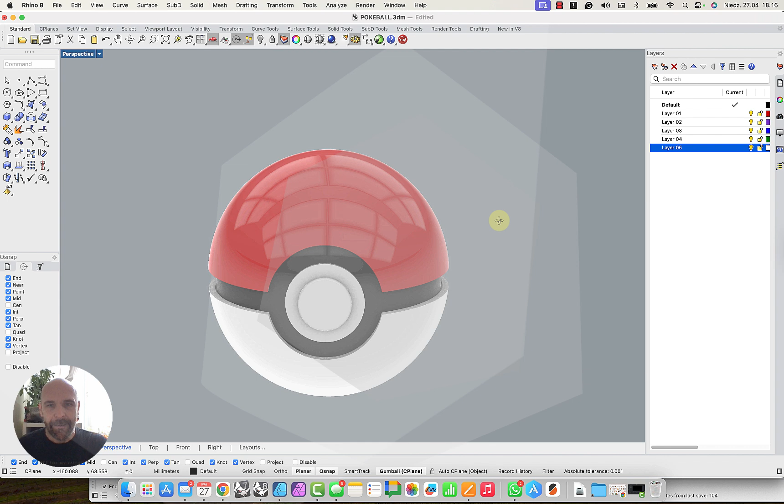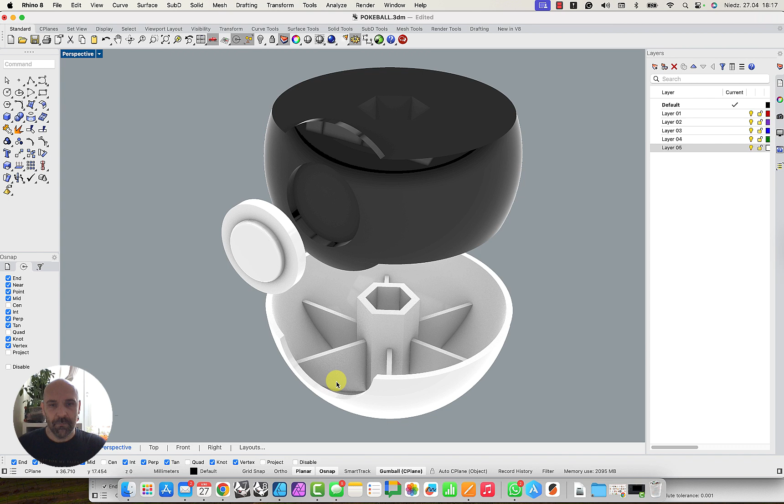Today we're going to learn to model a Pokéball, like you see on the screen right now from Pokémon. It's gonna be very easy, I'll show you how to do it. It's kind of fun because after you actually model it, you can print it. I've prepared some special features for the Pokéball to be solid, and it's very easy to model. I mean, I hope it's easy, we will see. Anyway, try to follow me, step by step I'll show you how to do it.

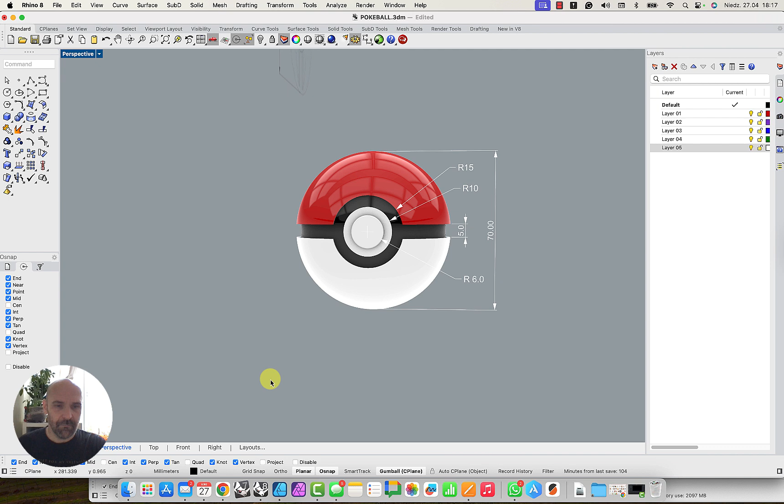So I start with declaring the dimensions. In this case I wanted to be very ergonomic, so I prepared the dimensions like you see on the screen right now. I made a screenshot of that dimension so we can have it on our work area to the end of the tutorial, so it's actually with us. I'm going to put it onto a layer and hide it.

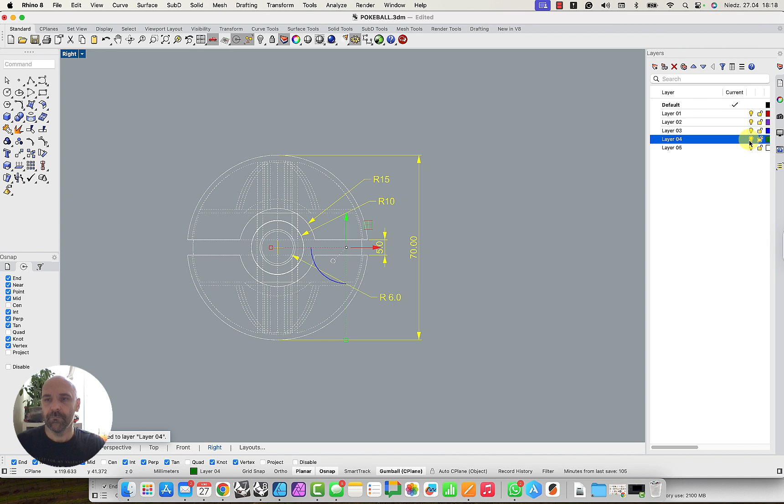Alright, and I'm going to switch to shading mode, and front view is going to be the view I'm going to model it in. So I hide the already modeled Pokéball.

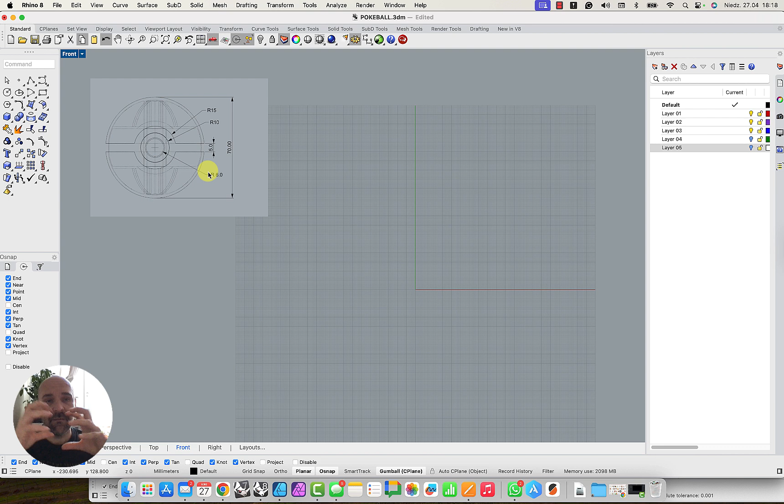So let's start with the sphere. Generally, the tutorial's going to be made with the Pokéball made out of these two spheres, and then I'm going to split it into the shells. The second sphere is going to be just construction to join the two outside spheres. So take a look, the first sphere is gonna be diameter 70. So let's go and get the sphere.

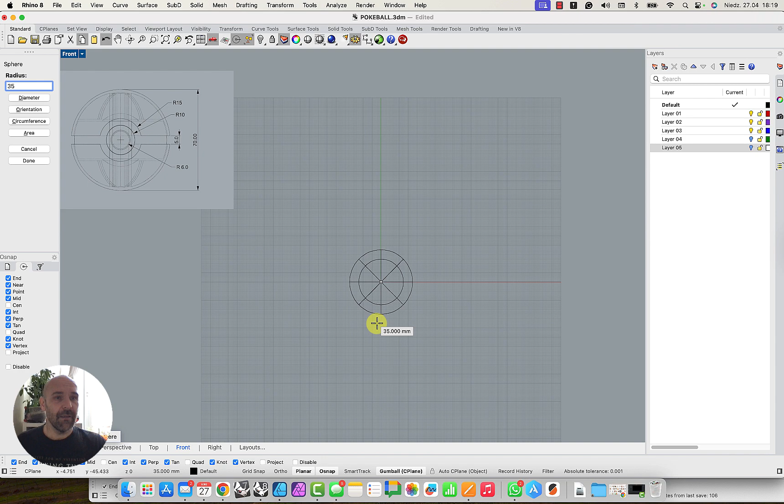I'm starting everything from the 0 point, which is good habit. So let's do it now. Type 0 and press enter, and then just type 35, because Rhino is asking me for radius, and I'm having diameter here, so 35 gives me 70. All right, and I have it.

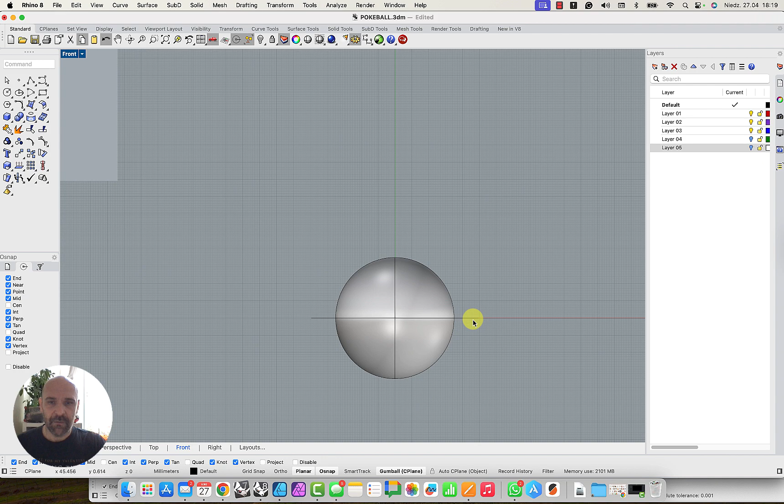The gap between two shells is going to be 5 millimeters. So I'll draw a line from the 0 point, and then I'll move this curve to be just in the middle of the sphere, and then I'm going to offset this line on both sides by 2.5 millimeters. So let's select both sides, and then we've got it. I can delete that middle line, and then between those two lines I will trim.

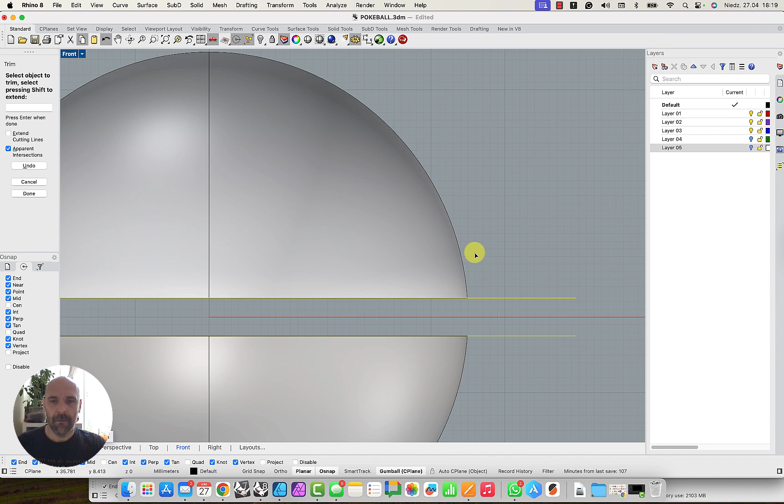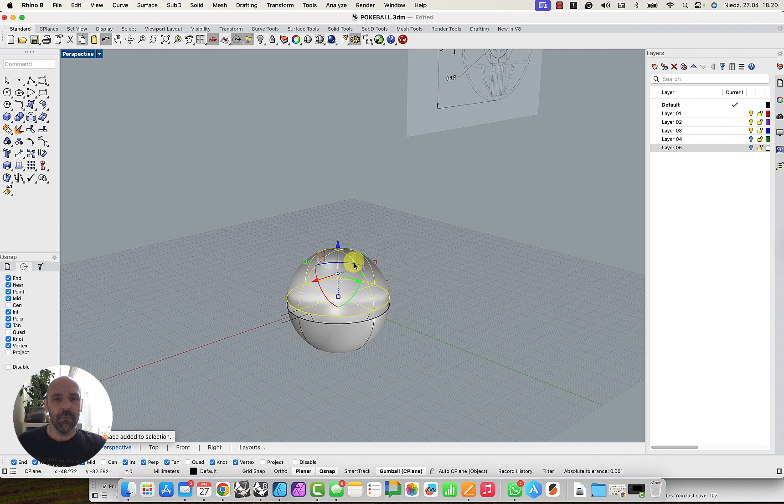So this is declaring the first two shells. Those shells are empty actually, and I need to close it, and then just by typing cap, CAP, this gives it a nice beautiful flat planar cap, and then I can do the same with the bottom, cap. Right, and straight on I need to have thickness.

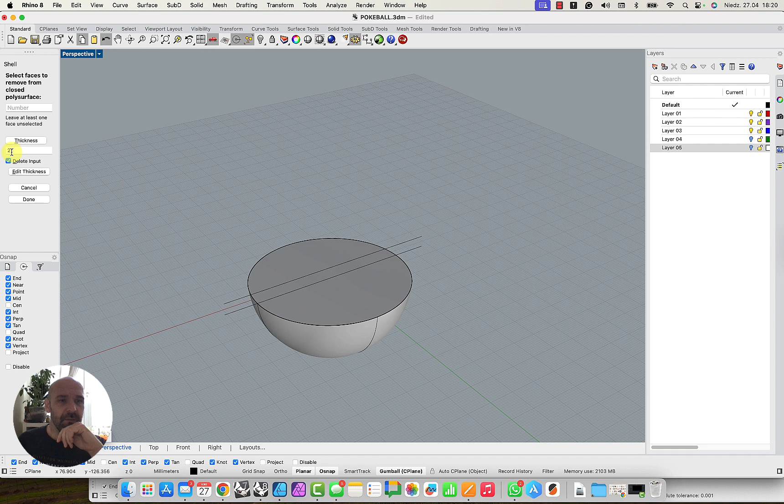So straight on I'm going to type shell and declare thickness, which is 2 millimeters in this case. The 2 millimeters is optimal for that kind of structure to be solid when you print it. You can increase it a little bit, but not less than 2 millimeters, I suggest. So this is the thickness right now, and the same here, shell. All right, so we've got two shells.

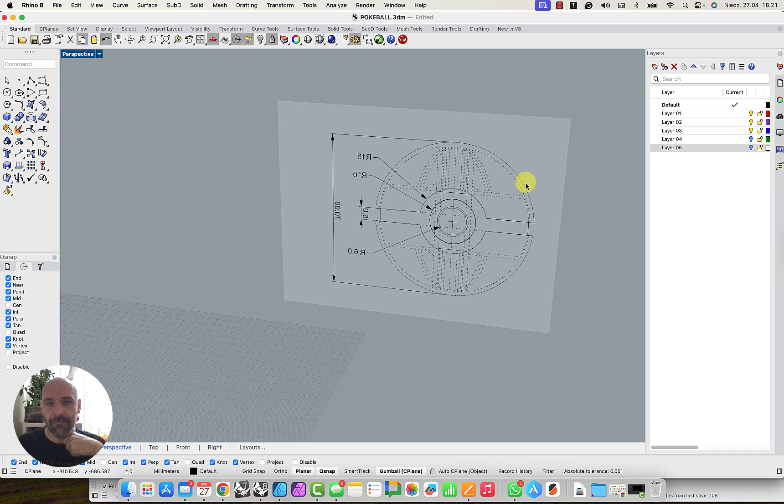Basically, we're gonna keep focus on one because, as you know, the Pokéball is symmetrical, so we don't need to have two sides. We can mirror one of them later, but just let's stick out both sides for the shells right now, maybe later we'll delete it.

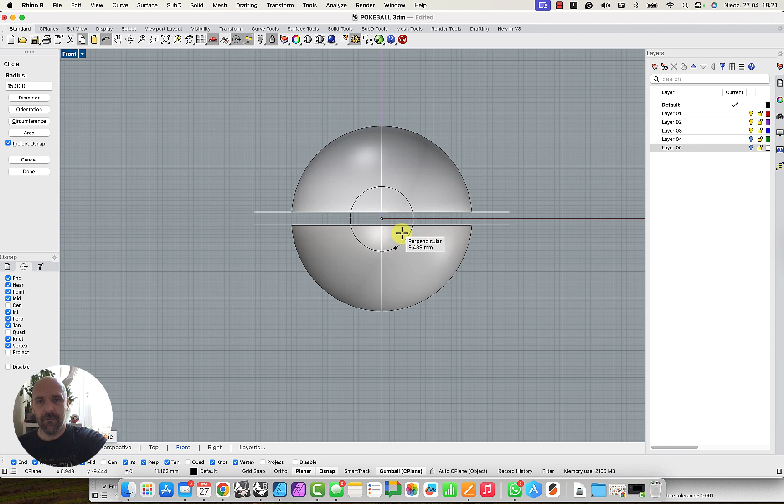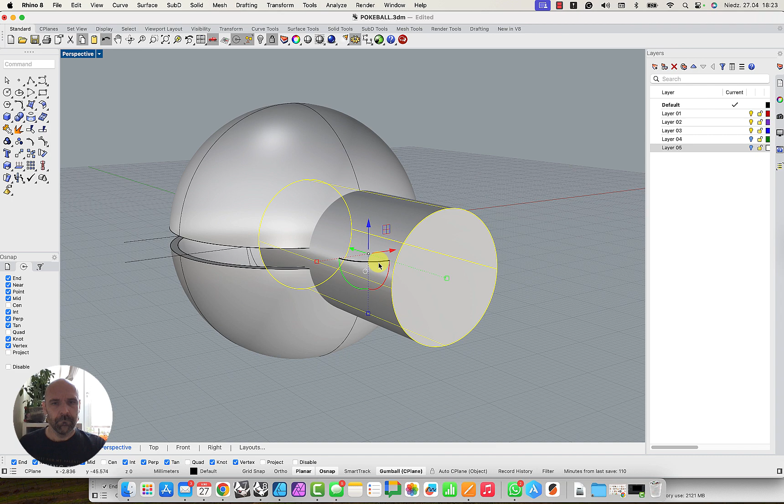Okay, so now I'm going to have the circle, the cutting in the shell, the half circle here, cut it. So I'm going to have a radius 15 circle, which is also from the 0 point, radius 15. Yeah, I've got it here inside of my sphere because the 0 point is just in the center of the sphere, and then by just pressing that dot, directed in the y-axis, just drag and drop.

And use the command boolean difference. So those two shells are gonna be the input for subtract from, and then that circle's gonna be for subtract with. Press enter to confirm. Okay, so go to the front view now, and now I've got a beautiful cutout in the center of my Pokéball.

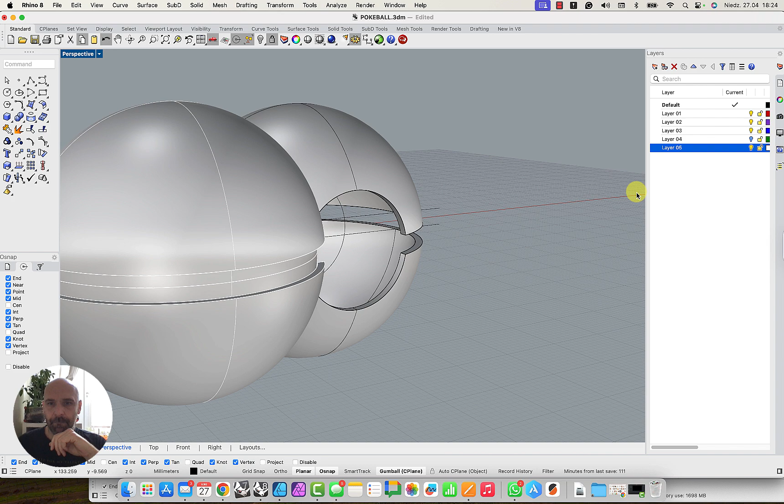And now we need construction inside, which is actually this construction here. I'll show you. It's gonna be holding both sides, and then you've got a kind of insert construction inside to fix the Pokéball in the right direction. Right, let's do it.

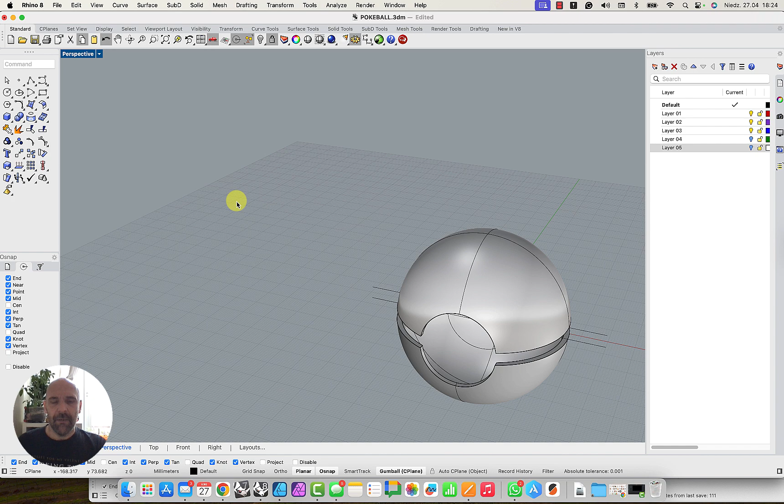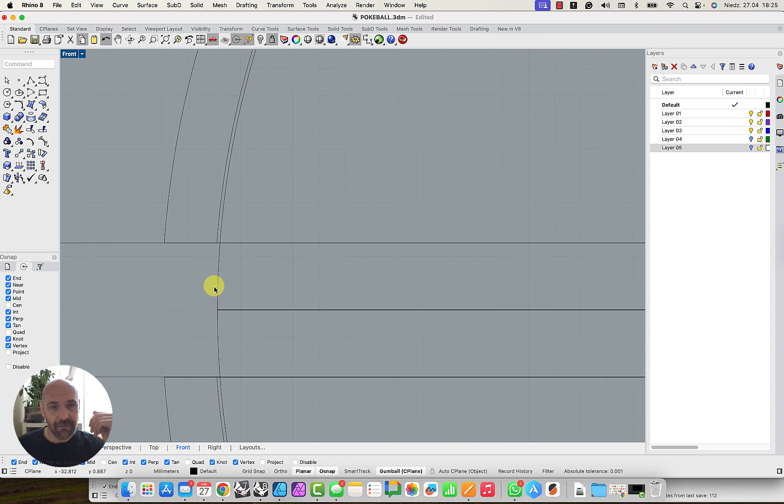So let's go for another sphere, 0 point, and then shift directing the mouse on the left or on the right, lock it with the top, and then find the right position, which in this case is going to be somewhere here. It doesn't need to be very precise because it's inside, and it needs a little bit of gap to be able to connect both shells together. All right, it looks like so, already looks great.

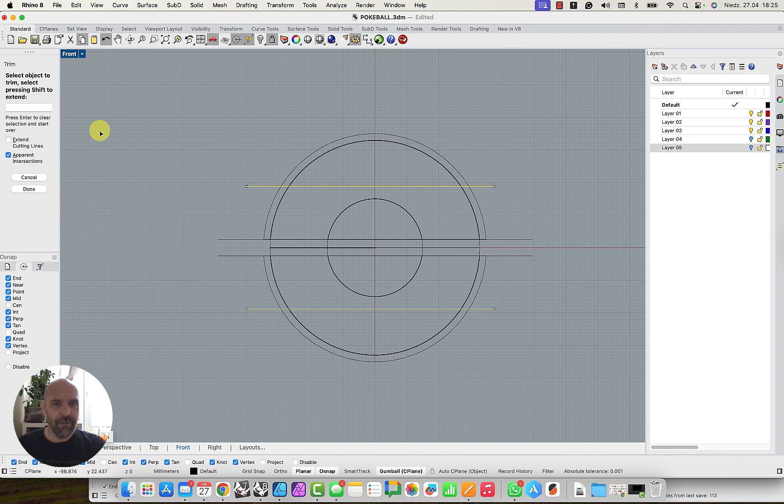Right, and now we need to cut out the inside sphere, just a little bit upper here of my construction, and then mirror it on the other side using the 0 point as a mirror point. Right, and then I'm going to cut out with trim the inside sphere.

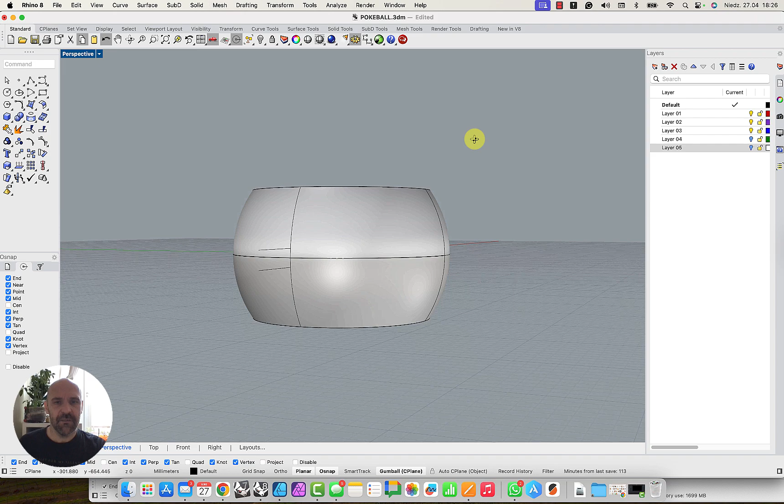Okay, I don't need those curves anymore. You see, I've got construction inside, and then I'm going to hide the shells, and I got my inside shell ready to be capped. Alright, I've got it. Now I need to have the inside button here placed somewhere, with a specific dimension, which I will find here: the outside is a radius 10 and the inside button is 6, so

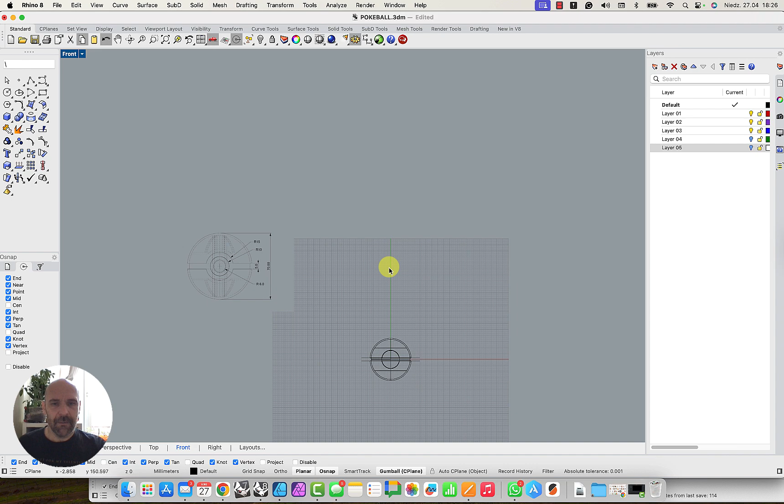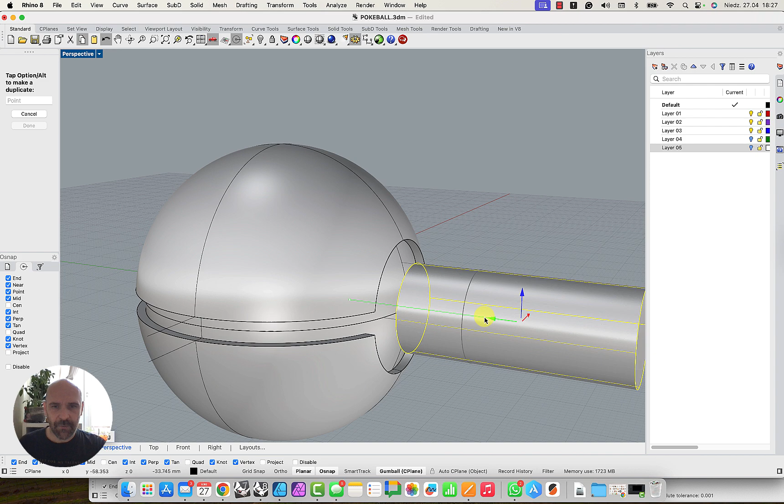10 and 6. Alright, in this case I'm going to place a cylinder from the 0 point, and it's gonna be radius 10. And my size of cylinder, let's just build it, and I'm going to cut out a hole here for the button to be placed later after printing. Okay, so let's just boolean difference.

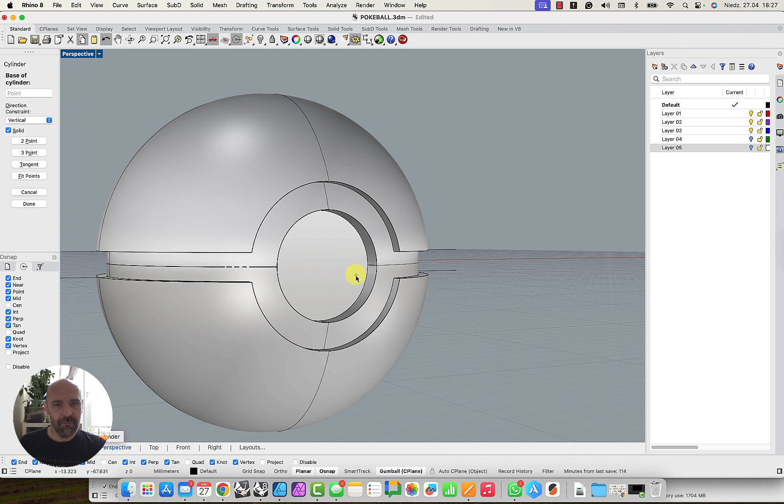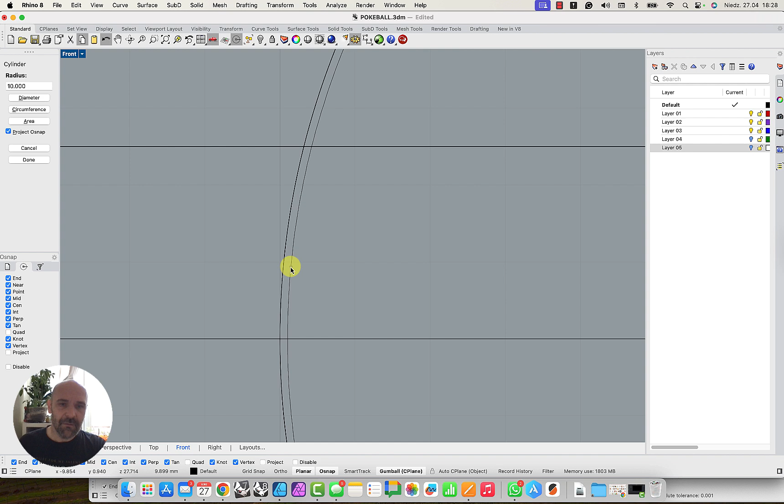Alright, so this is the place for the button, and now I'm going to draw my cylinder again, but the starting reference point is going to be that surface. I need to have the center of it. Go to the front view and make your cylinder a little bit smaller, like 9.9 or something. Just give it 0.1. I can type it as well, but there's no need to type it. And then just build it a little bit outside the form, like so, and it's ready.

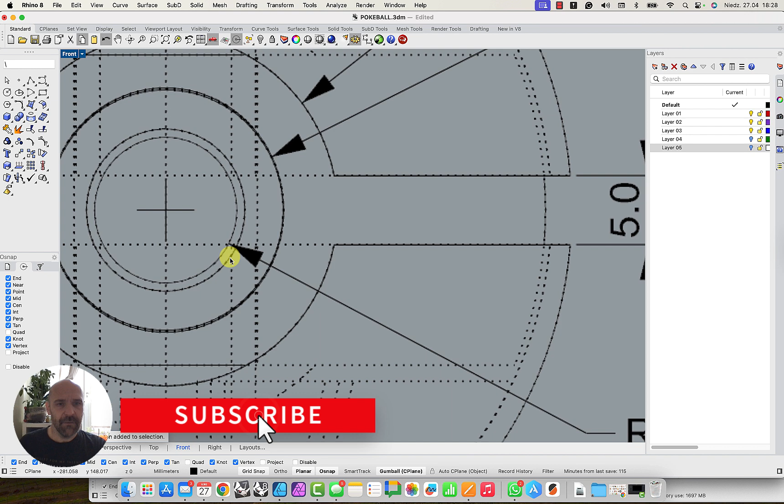And now we need to place the button here. This is gonna be printed separately as well. Right, so let's have a look at the inside size, which is 6, but I see I have selected the fillet cutout, so I need to give it a little bit more, like 7 or something. Let's try to put another cylinder there. Find the center of the previous cylinder and then radius 7.

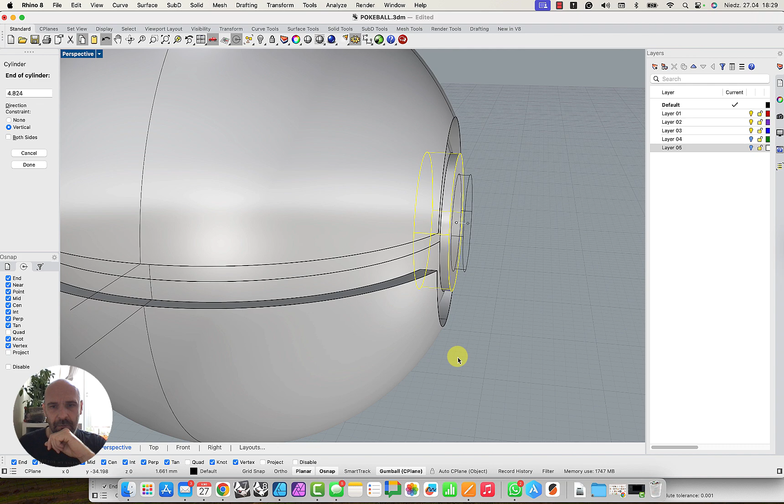It's okay. Going a little bit, like 1 millimeter. Let's see how far we can go. 1.5. So type 1.5 millimeter here, and it's gonna be our button. We can now boolean together, and then I will give it a little bit of fillet here to look smoother and nicer. I guess 1 millimeter should be enough. Yeah, 1 millimeter is enough.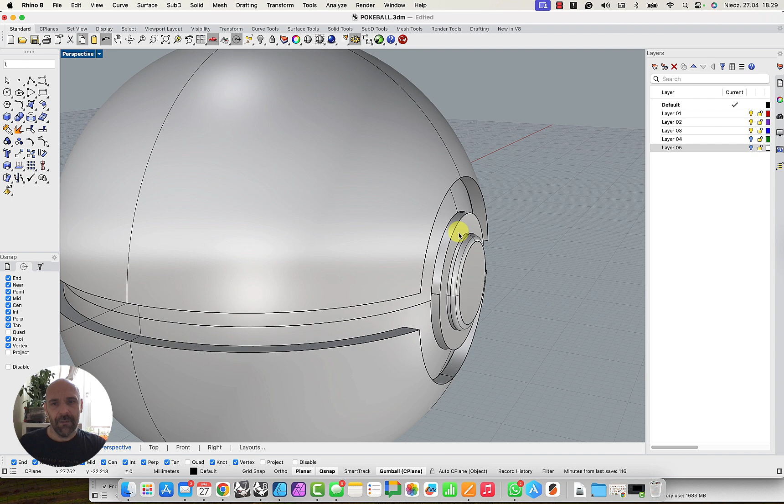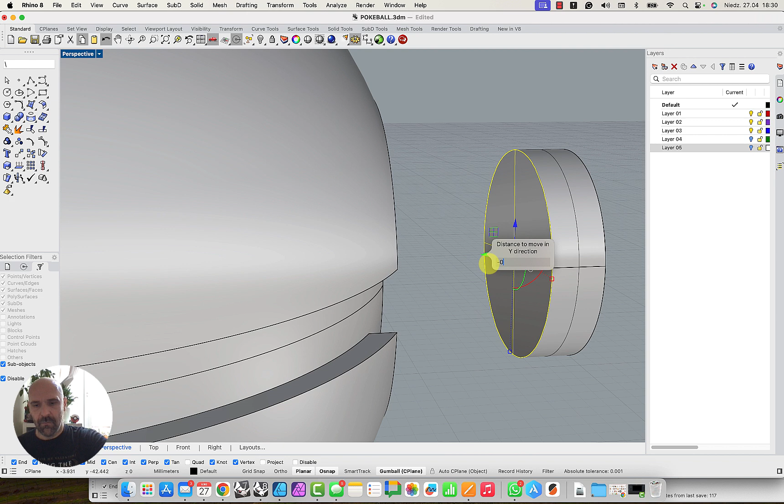I'm not sure if it's okay to be that much outside of the form, so, and this is a nice feature of Rhino, I can turn on Gumball and then move it here. Just select the surface and move it by hand, or just by clicking on it and typing minus. In this case, I have to type minus because my arrow points the opposite way, and I need to rescale a little bit. So I will do it like minus 0.5. It should be okay. Let's see.

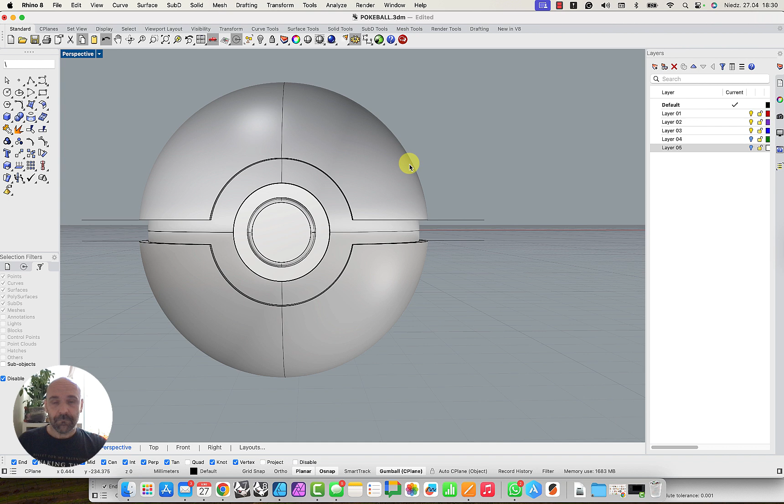Now let's turn it off and then move it with the move command to the right position, which is the surface I started making the button cylinder from. Now it looks okay. All right, so we have it. Now I need to focus on the construction, which I'll show you right now. The construction is going to be made first by placing the right shape, which in this case is a polygonal shape with 6 sides, but in a specific position.

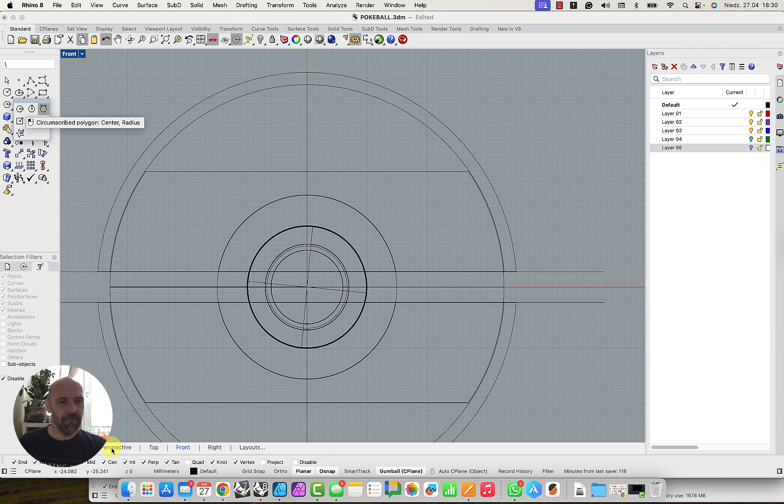So let's hide the shell. Well, now it's time for deleting it. So I will delete half of it. Now I'll place my polygon shape over there. So let's type 6. 6 is already chosen, and now I need to select the center. Well, I don't have the center because this is cut out from the sphere. So I need to draw a specific line to find the center of my top shape.

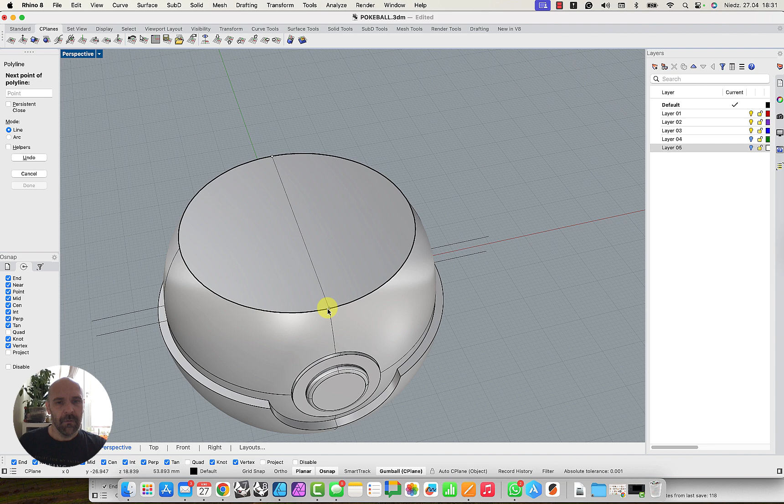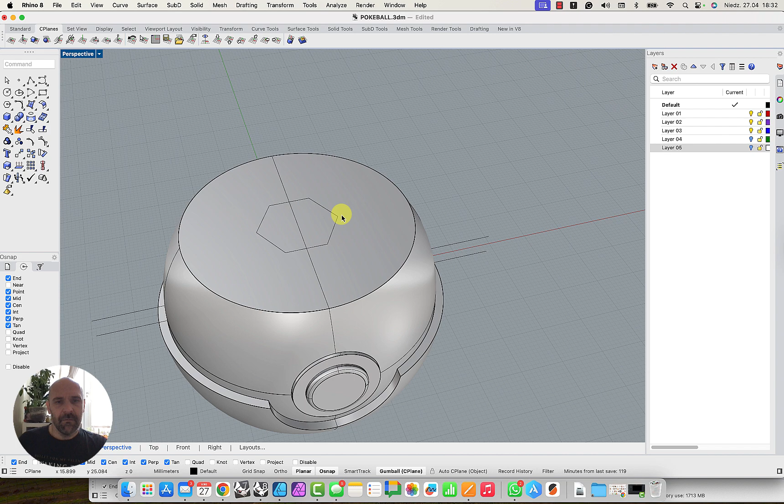Let's draw the line. I don't need knot and vertex, and I don't need near. I need end, midpoint. Yeah, and now I have a center, and in the middle of that point I will place my shape, like that, and then I'm going to extrude it here, or maybe I will extrude it both ways like that.

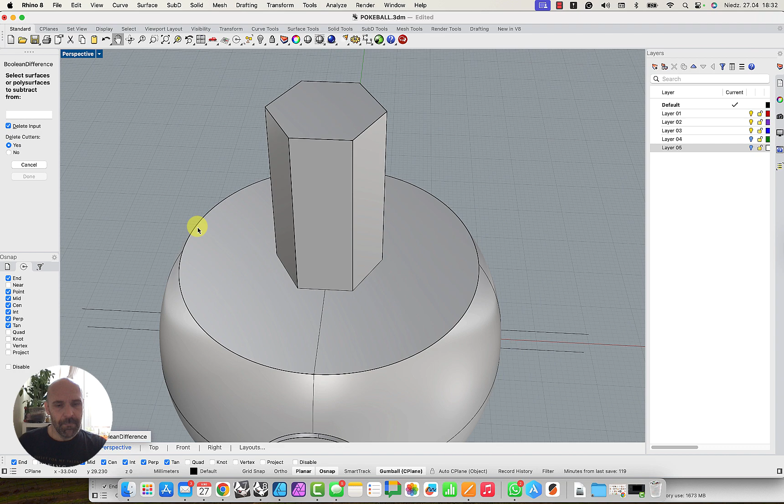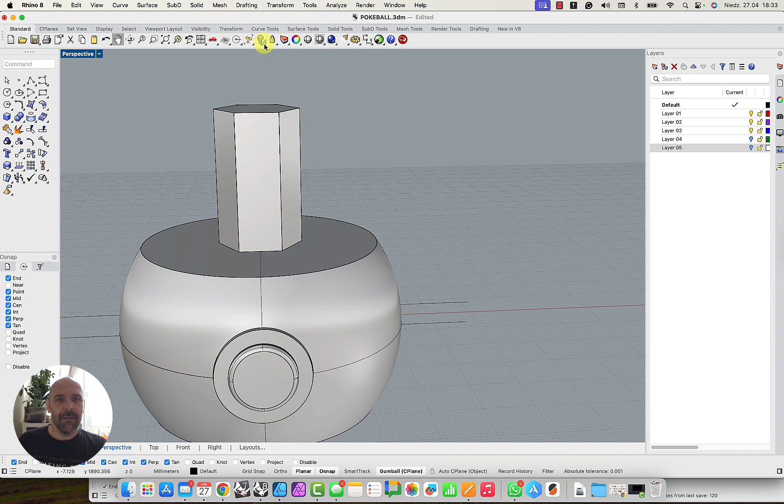And then I'll make a hole, cut it, but before I cut it through, I will make a copy, Ctrl C, Ctrl V, and then with Shift pressed, scale down the copy, which is now inside, and I will boolean difference the first shape, which, you see, left a gap for placing the top shell of the Pokéball. Now I will try to fit it. All right, now I will find my Pokéball shell.

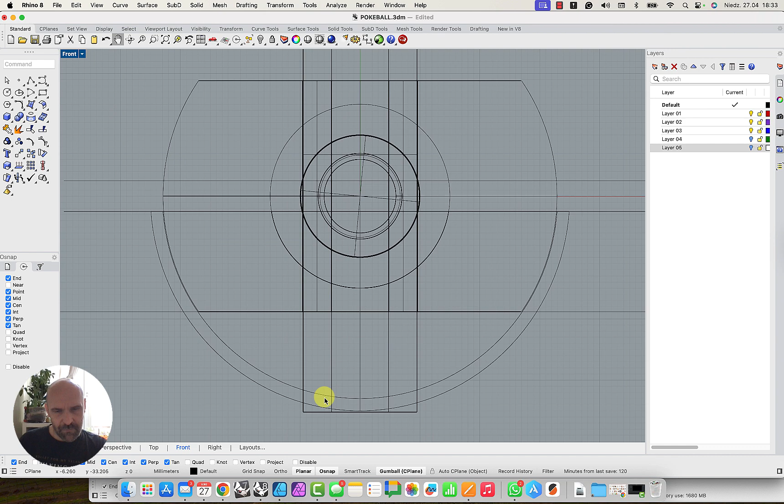There it is, and I need to find the limit; the inside sphere is coming up to here, so I need to select and mark that area, because I'm going to make nice slabs over there down to the bottom of the inside shell. Okay. Probably gonna be good to cut that shape here. Yeah. All right, and now I'll hide it and cap it.

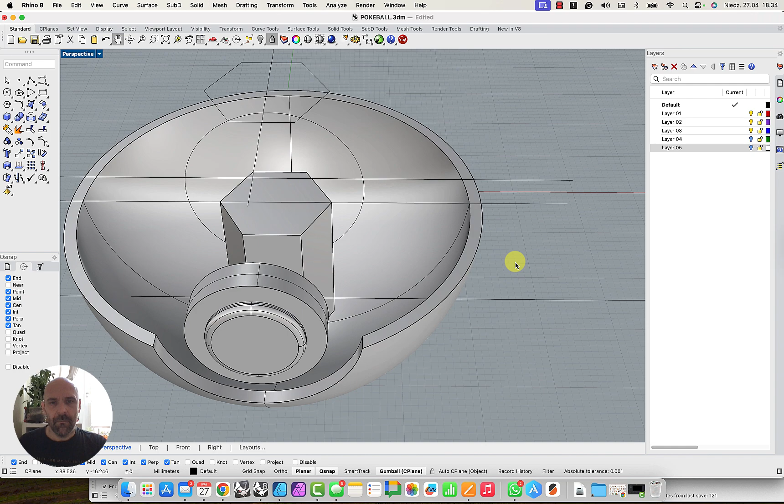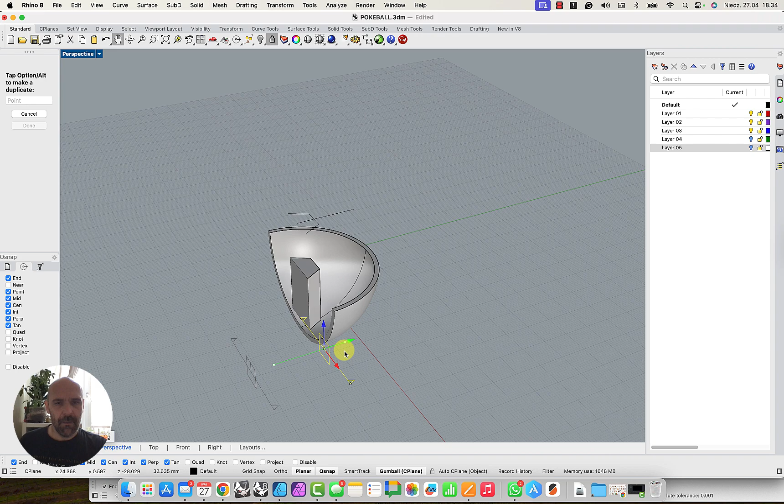All right, now I have it, and this is gonna be my shape, but the shape isn't going straight to the bottom of my bottom shell. Let's see it. Clipping plane will help us see how far we are. Yeah, we need it to be extruded to boundaries here and then joined together. So let's just extrude to boundaries.

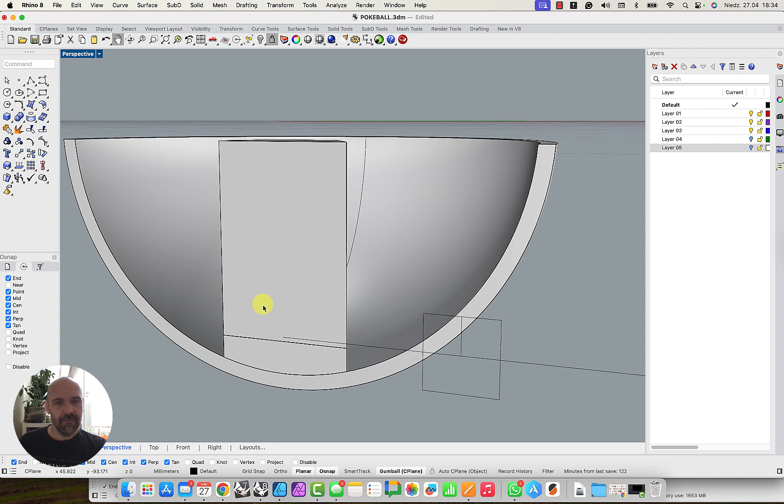Enter and again to boundary, and the boundary is gonna be here. Yeah, we've got it. Fantastic. And then I can join them actually all together. Okay, the clipping plane, as you see, helps you to work in the kind of slicing option. You slice that with a specific plane, and then you see all through. Okay, but I don't need it right now.

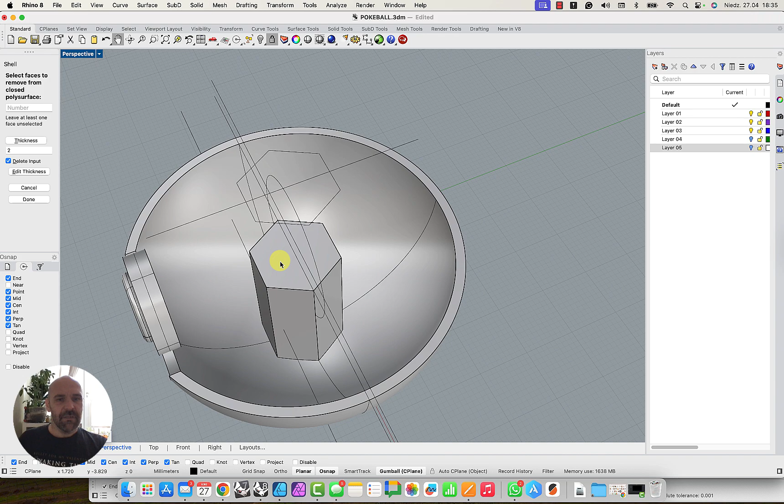Now I will make the construction inside. Probably it's going to be good for printing if I make a 2mm shell over here as well. So the 2mm shell is going to be here. Alright, it's good. And now I need to find my limitation here. The limit line. And then it's gonna be the limit for my ribs here. I can delete that shape as well. I don't need them anymore.

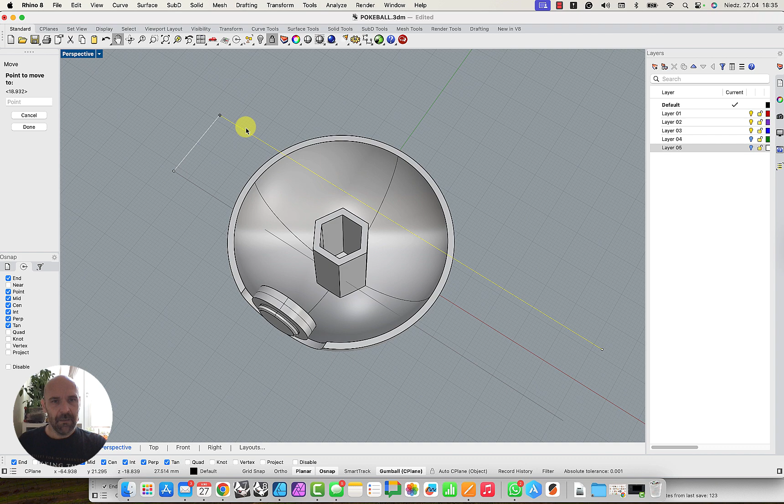Okay, now this is gonna be helping me making the ribs to make the solid construction. I will center it. I'll kind of, yep. Okay, this is gonna be my rib shape. Let's see if it works. The rib, it's here. This is the rib. Let's see if this works.

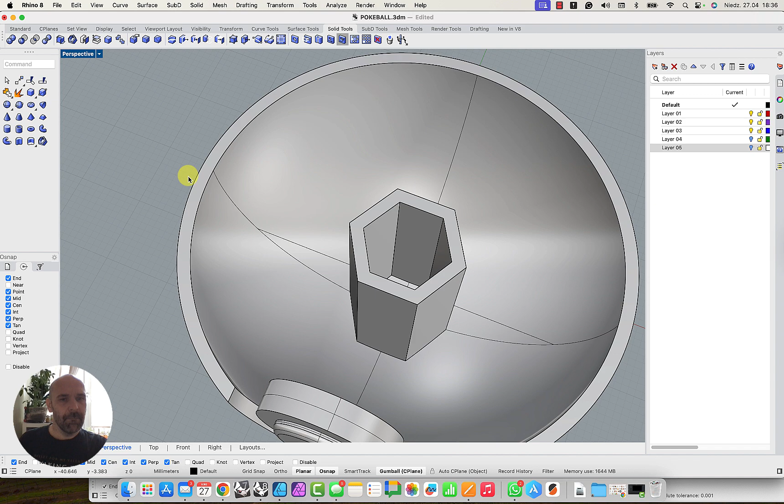Select boundary. Distance 2mm should be okay. No, not 2mm. Hole through. Normal to curve. Let's do it again. Yeah, that's how the rib's gonna be made.

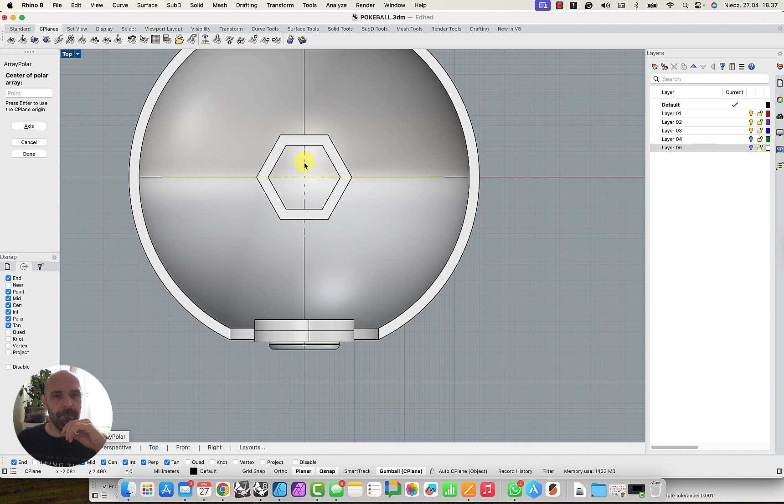Okay, let's just duplicate that 3 times over the center point from top view. Let's just zoom it. Okay, here's my line, and I'm going to duplicate that line. This is my, here we are. This is polar array with 0 point, and then probably 3 times gonna be enough. Let's check out. Yeah, it's gonna be enough. So I've got 3 lines which will now help me to create construction with the rib tools.

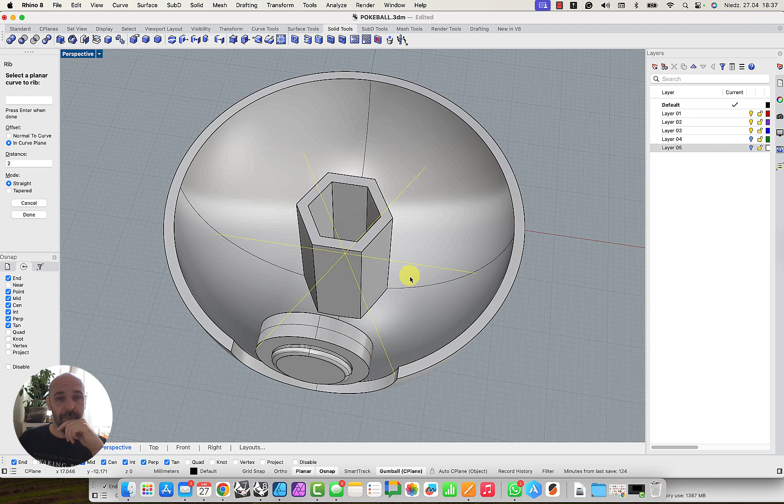Let's do it now. This is gonna be my ribs, and that's gonna be my construct. I can curve it inside as well. It will strengthen my Pokéball much more. All right, so let's just go and see what's inside. So basically now it works fine.

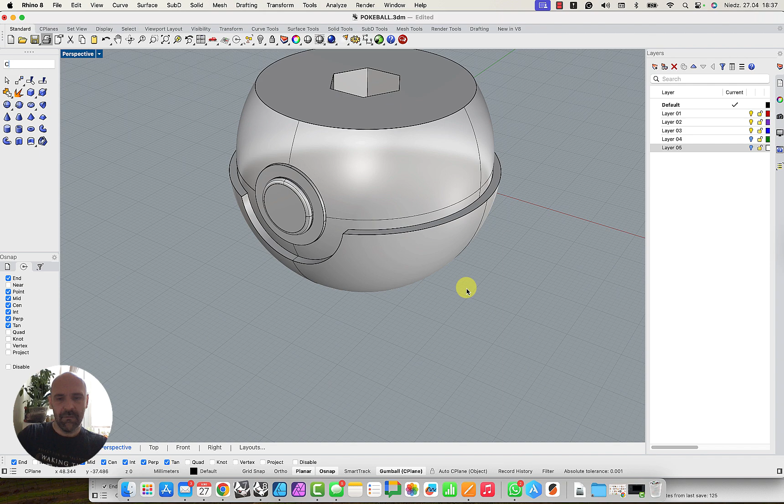Let's see it with the clipping plane. Let's cut it somewhere there. Right view. Does it look alright? Yeah, I guess it does. The gap here is fairly enough for printing to assemble that later. Here too. Alright, here we've got a gap to assemble the button too.

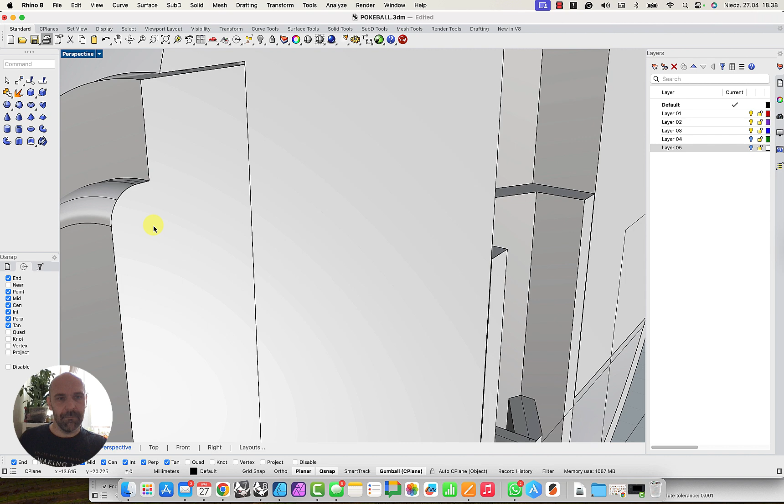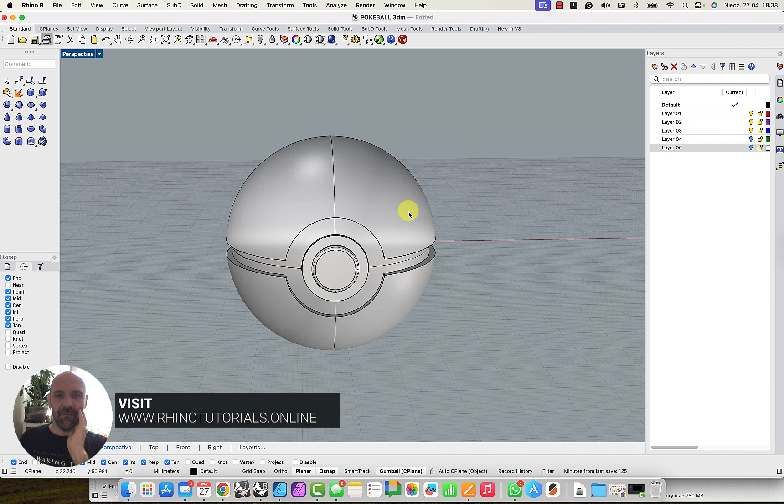So basically the one and only thing we need here is to mirror that with the mirror command by the middle of it. Let's see. Yeah, that's how our Pokéball is gonna be constructed, and that's probably how it looks. Now the only thing I need is to show you in the render mode, but I need to apply materials to it.

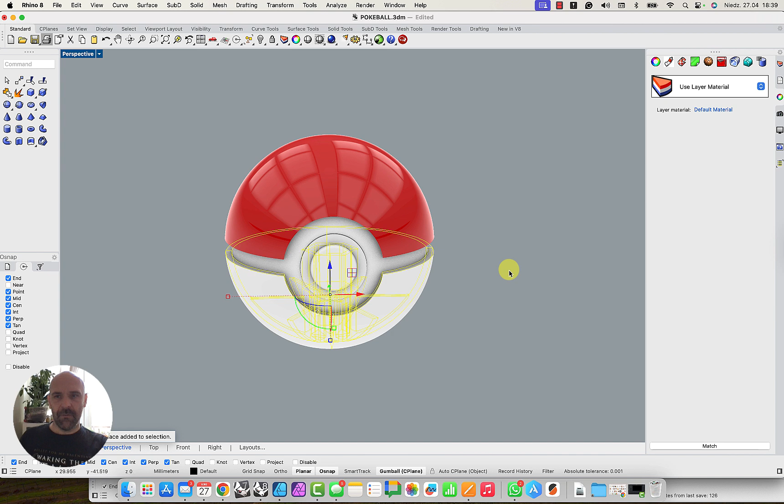So let's go to materials. Materials are here. Select, that's gonna be red. Beautiful paint here. Let's go to the render mode. That's gonna be shiny, beautiful white paint. That's gonna be beautiful, scary dark. And now we've got our Pokéball. Well, that was easy.

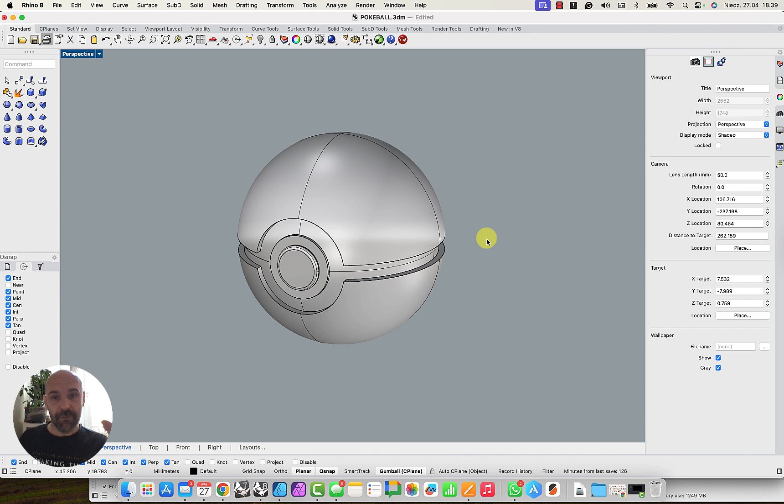Looking great, really great. So the last thing you need to know about the Pokéball and making it real is just how to prepare it for printing. So the best idea to prepare it for the print is just to prepare it as this and put it onto the printer plate. This one is gonna be exactly the same way, like that. This needs supports somewhere, probably only on the ribs.

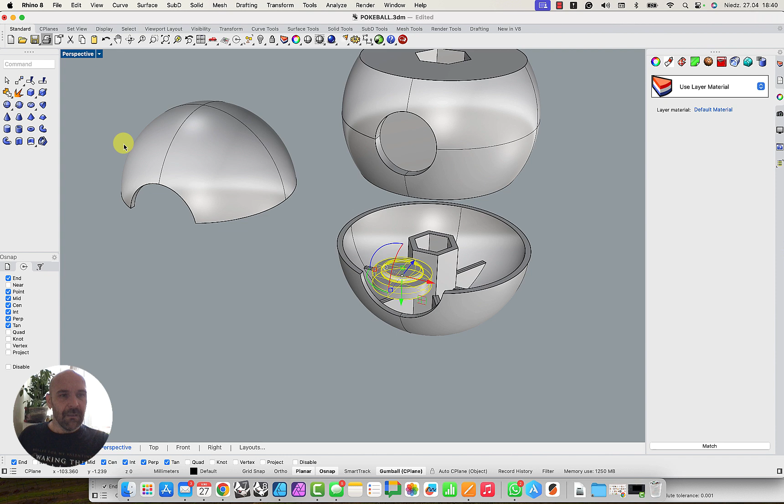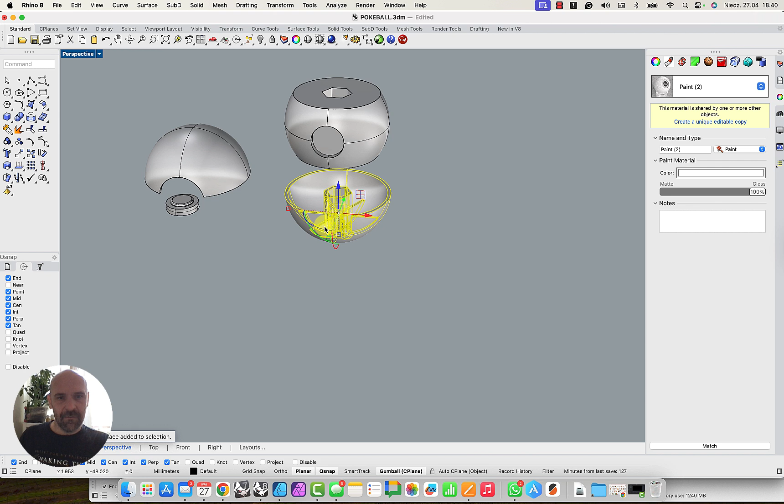That's gonna be printed with a white shell, so you can actually rotate it -90 and place it somewhere there, like from the bottom to the bottom. Remember, the bottoms must be aligned as it is here. You see, so this is the first print with the white. This is gonna be the second print, I need to just rotate it 180 degrees. This is the second print with the red, and this is the third print printed with the black filament.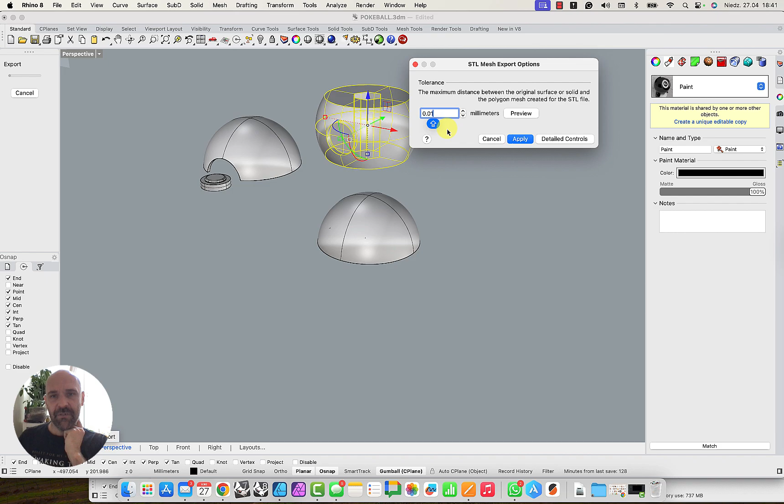So this is it, and you export it. Just remember about that, because this is kind of important. If you export it selected, you need to decrease the amount of STL triangles, because otherwise it will be very sharp. So usually I'm exporting it by decreasing here. I prefer to decrease like that much, and then you see how it looks. Now it looks like so, which is important because you don't see the steps here.

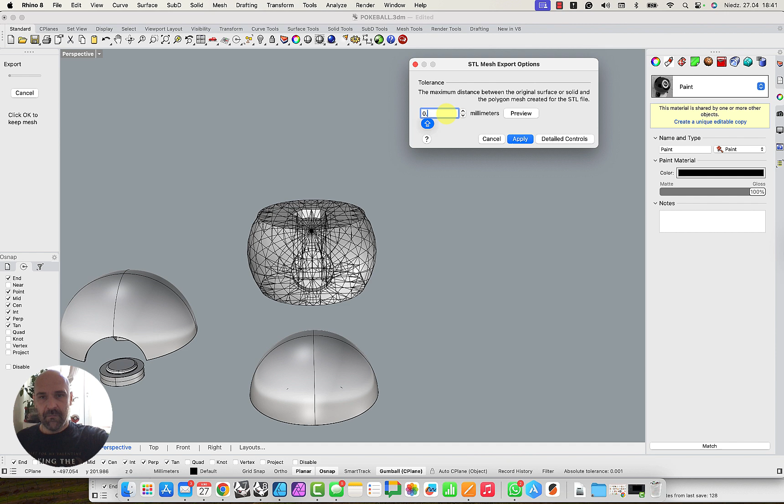When you export it as, for example, 0.1, because you can also do it, the printer will treat it as a line, so it's gonna be a very, very edgy Pokéball, which I don't recommend. Usually I'm printing at 0.01, and that's fairly enough. And then export each part selected and each part separately, and then you've got a great, beautiful Pokéball. So this is it for today.

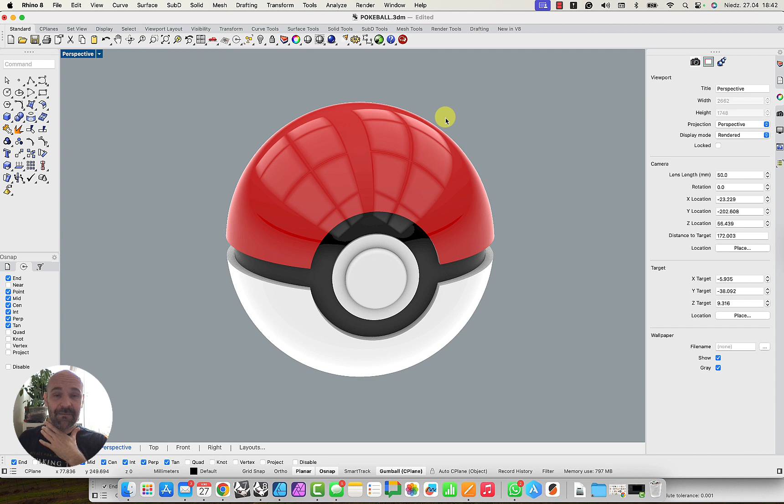If you wanna see how it looks, it's actually behind me, my printed version of it. So this is a Pokéball I printed for my son. It looks really great, and it's actually handy, very handy. Looks very nice, it fits the hand, and you can catch them all.